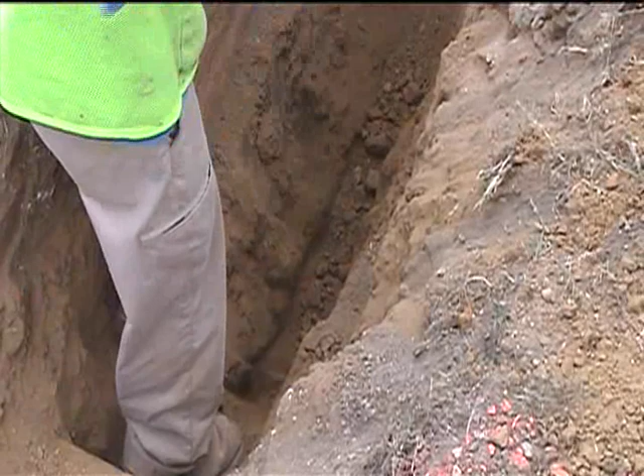Trenches and excavations are common at many construction sites and are considered one of the most dangerous construction operations. Digging a hole in the ground seems simple, but it is estimated that over 100 deaths per year occur due to cave-ins and other excavation hazards. Digging can be a major cause of concern unless you know proper techniques and the OSHA rules for excavation and trenching. Never dig until you know it is safe.

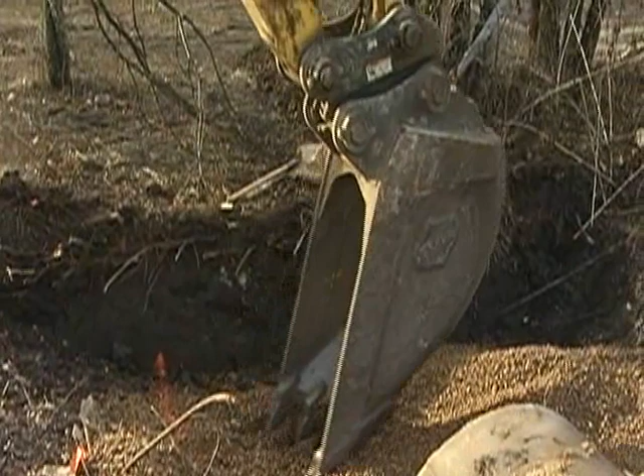This video will discuss the various aspects of excavation and trenching and will cover the following: OSHA requirements, hazards, working safely in and around excavations and trenches, general requirements, mobile equipment, and the competent person.

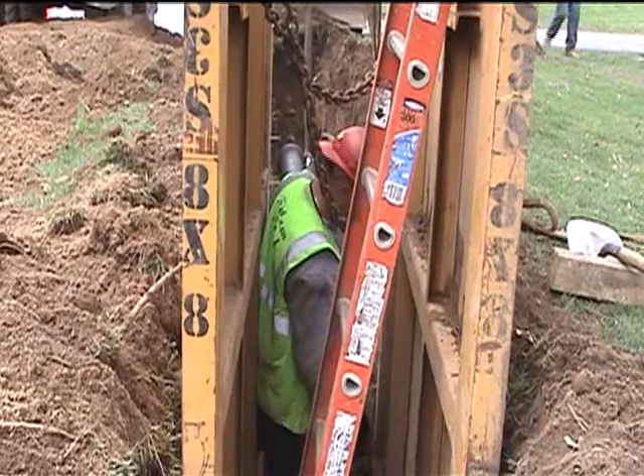OSHA Regulation 1926 Subpart P is the relevant standard for trenching and excavation work. This OSHA regulation applies to all open excavations made in the Earth's surface and requires workers in trenches and excavations be protected from the hazards that can occur in the operation. Prior to any excavation or trench work, the OSHA requirements should be reviewed and followed.

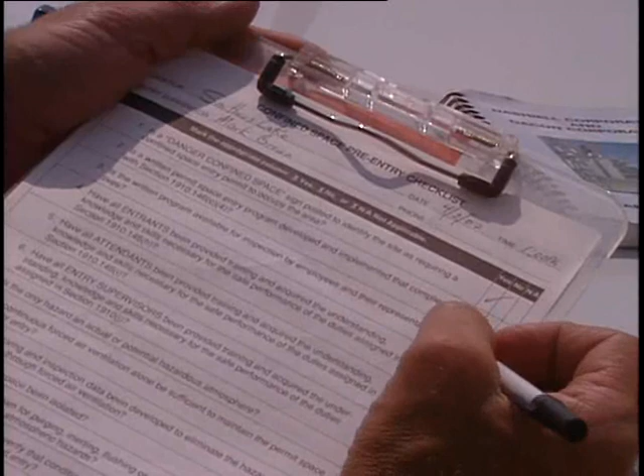Companies are responsible for knowing and following current federal, state, and local laws, implementing an effective health and safety program, and ensuring all affected employees work safe and follow rules and regulations.

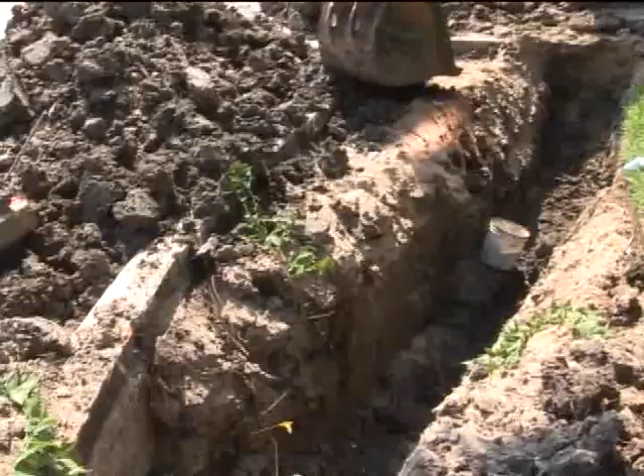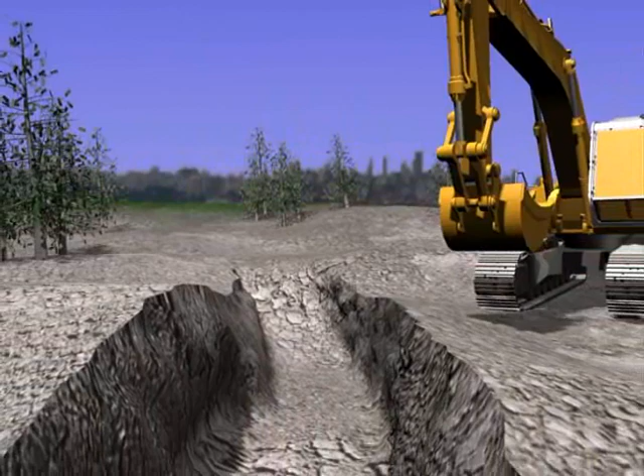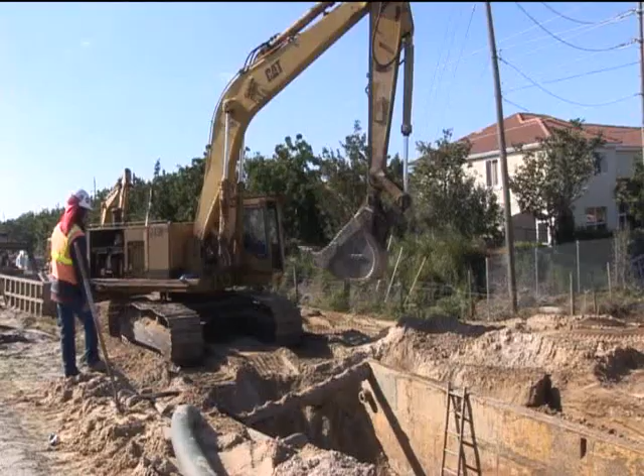By definition, a trench is considered an excavation, but there are differences between the two types of openings. An excavation is any man-made cut, cavity, trench, or depression in an earth surface formed by earth removal. A trench is described as a narrow excavation made below the ground that is deeper than it is wide. Trenches can be up to 15 feet wide.

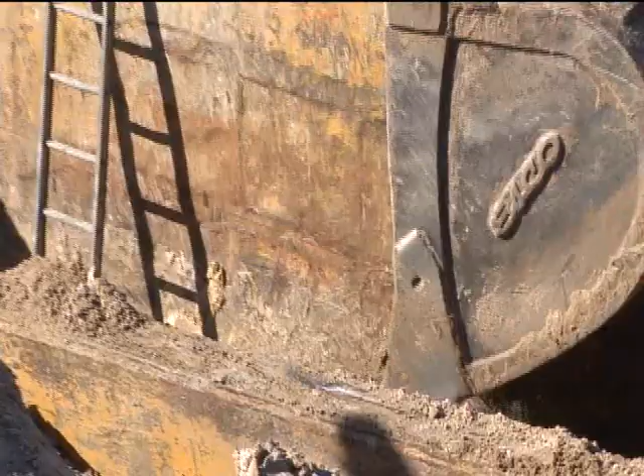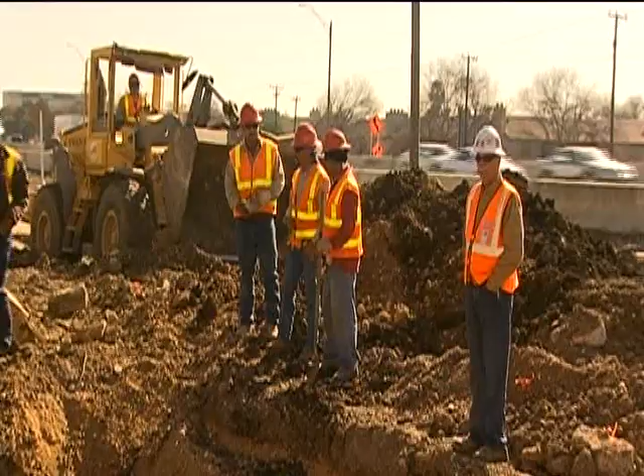The most feared of all the hazards is the possibility of a cave-in. All excavations are hazardous because they are inherently unstable. Workers can be seriously injured or killed if the sides of a trench collapse. Unsafe trenches are the major factor in many trenching hazards. Trenches don't have to be deep for accidents to occur. Serious injuries are also possible in shallow trenches that are less than 5 feet deep.

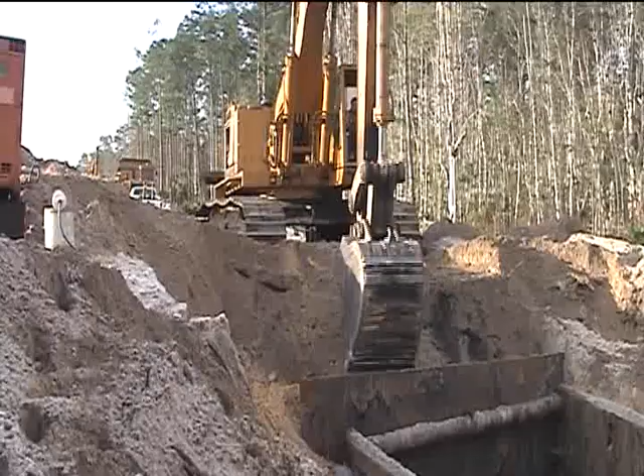A cubic yard of dirt can weigh up to 2,700 pounds and is capable of moving at 25 feet per second. A cave-in makes very little noise and gives very little warning prior to the collapse. Some causes of cave-ins include vibrations from equipment or traffic in the area, weight of equipment near the trench edge, weight of excavated material, referred to as spoil, too close to trench edge, poor soil condition, and rain or water which weakens the trench walls. If more than one condition exists, then the risk of collapse increases.

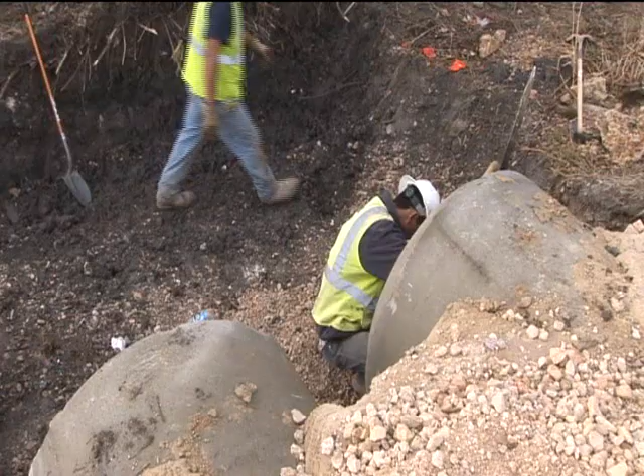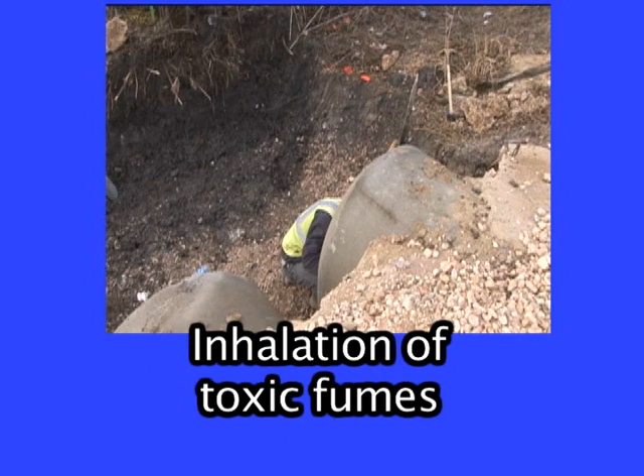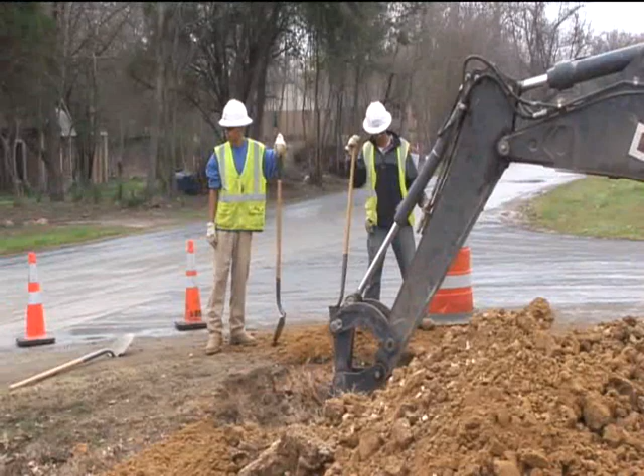Sometimes, excavations are considered to be confined spaces. Asphyxiation due to lack of oxygen in an excavation can occur. Inhalation of toxic fumes released during a dig is also possible. Drowning, electrocution, explosions, and fire are other possible hazards. And finally, when working near the trench, the risk of being hit by a vehicle exists, especially if you are near traffic.

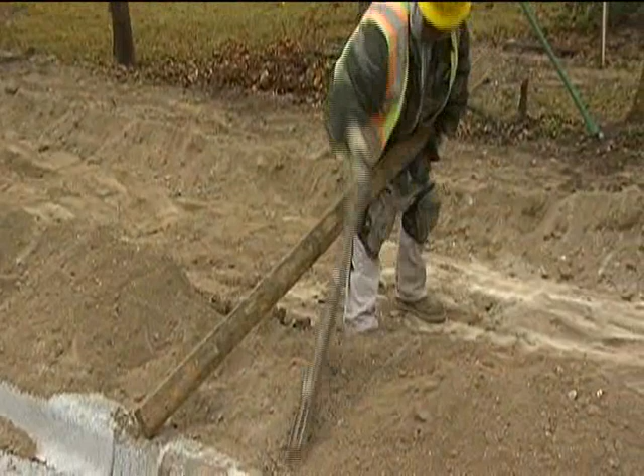Pre-job planning is vital to accident-free trenching. Safety cannot be improvised as work progresses. A key factor to safety includes performing a job site analysis and identifying hazards and possible hazards before work begins. Always take the appropriate measures to eliminate or reduce the risks of hazards. Any employee who is going to work in or near an excavation must be trained.

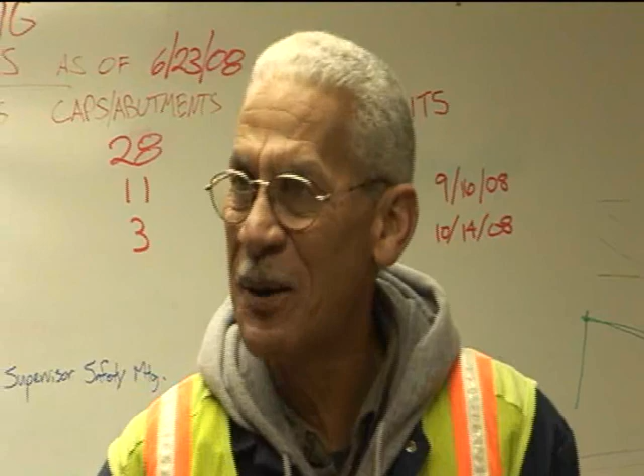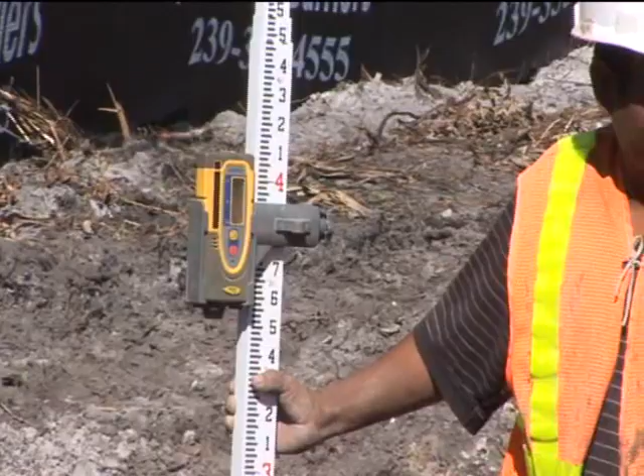A competent person must be on site at all times to oversee every aspect of excavating and trenching. On work sites, this person is generally the supervisor. A competent person is one who has training in soil analysis and in the use of proper protective systems. The competent person is knowledgeable about trenching and excavation standards, must be able to identify hazards and unsafe conditions, and must have the authority to stop work when unsafe conditions exist.

The competent person requires a greater level of training and experience than a normal worker. Any trench or excavation that is 5 feet or more deep requires the use of a protective system.

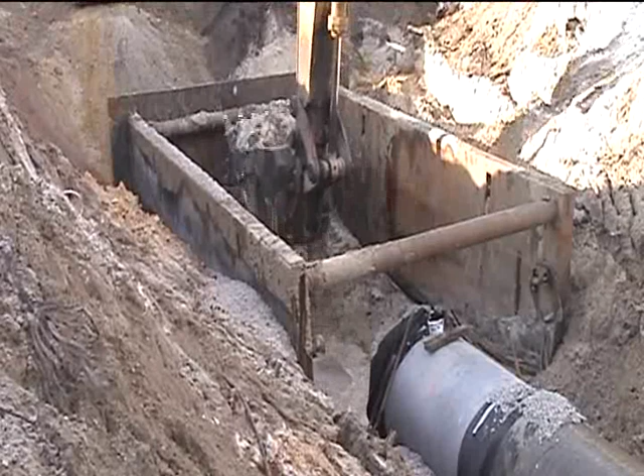Some contractors require the protective system to be in place in all excavations over 4 feet deep. If excavations are made entirely in stable rock or are less than 5 feet deep, and a competent person has determined that there is no potential for a cave-in, a protective system is not needed.

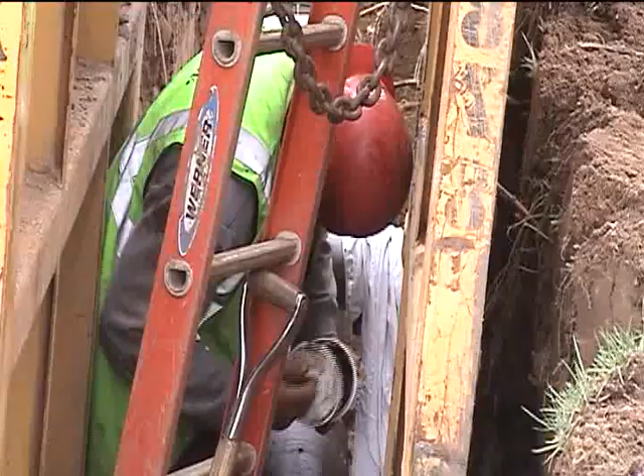Excavations and trenches deeper than 20 feet or below the base or footing of a foundation or wall require a protective system designed by a registered professional engineer. A protective system is a method of protecting workers from collapses of material that can fall or roll into an excavation or trench, or from the collapse of adjacent structures.

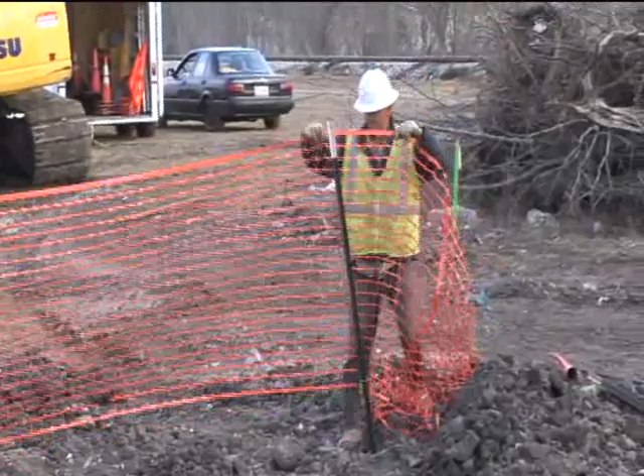Always finish excavation work as quickly as possible. Finally, it is imperative to barricade, protect, or cover an excavation or trench from anyone who may come close when workers are not present.

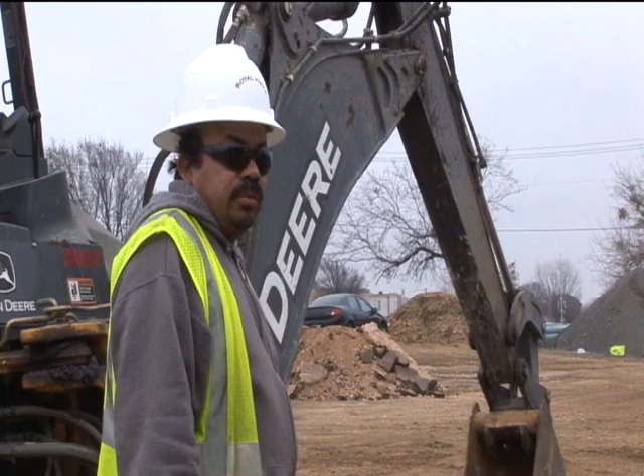Before digging, the competent person must evaluate the soil conditions. There are 4 types of soil classifications: stable rock, which is the most stable; type A, which is considered very good; type B, which is fair; and type C, which is the least stable and is considered very poor.

Soil classification is based on results of at least 1 visual and 1 manual analysis by the competent person. In a visual test, the entire excavation site is observed, including the soil adjacent to the site and the soil being excavated. The evaluator also checks for any signs of vibration. It is common for the competent person to walk the entire site at least twice and observe the areas that will be excavated.

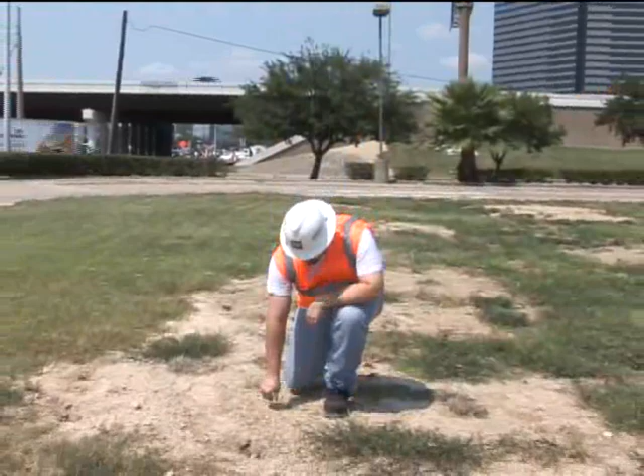A manual analysis consists of physically testing the soil and looking at different consistencies and attributes of the soil. Common tests are a thumb penetration test, which involves pressing the thumb firmly into the soil. The thumb penetration test is the least accurate testing method. A dry strength test, which involves crumbling a sample of soil in your hand.

A plasticity or wet thread test is when one attempts to mold a moist sample of soil into a thin thread approximately 1/8 of an inch in diameter by 2 inches in length. And finally, one can use a pocket penetrometer or hand-operated shear vane to determine the unconfined compressive strength of soils.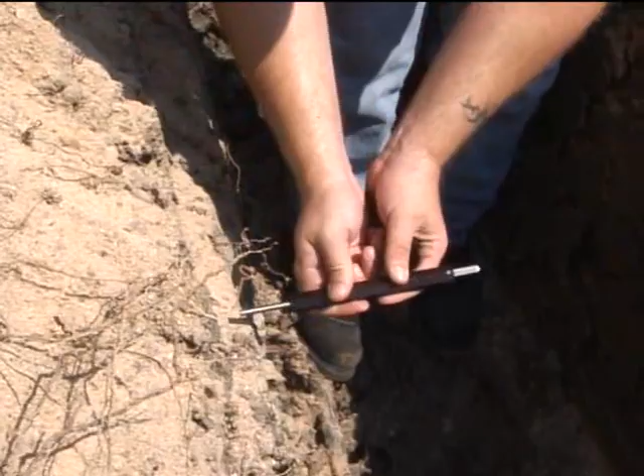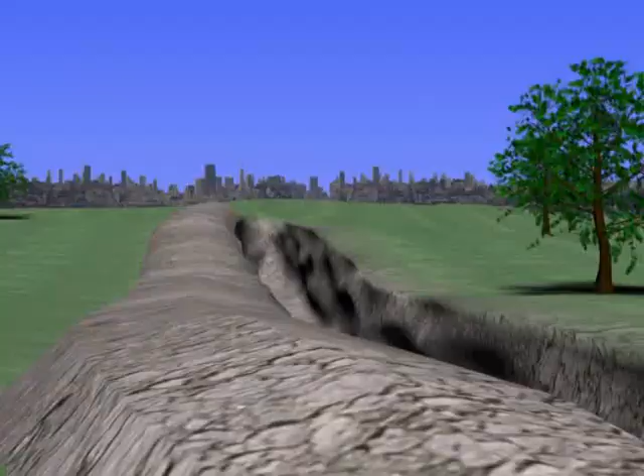Select and construct the appropriate protective systems in accordance with OSHA standards. The system used is based on soil classification. Protective systems include sloping, benching, and support systems including shoring and shielding. Sloping an excavation is when sides of an excavation are inclined away from the excavation so as to prevent cave-ins. The soil condition and the angle of repose determines the degree of slope required.

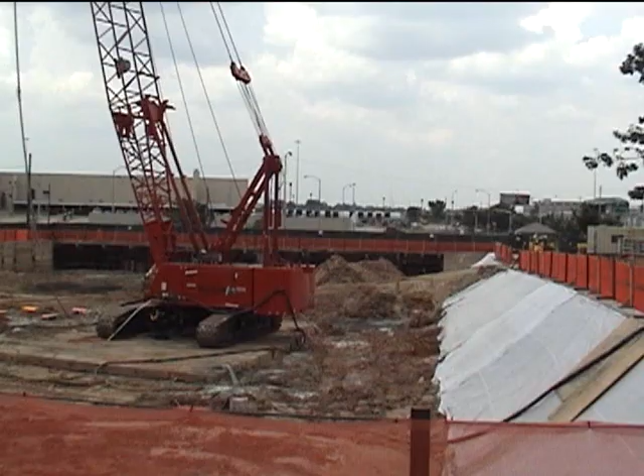Benching is a means of excavating the sides of an excavation to form one or a series of horizontal levels or steps, usually with vertical or near vertical surfaces between levels. If soil conditions warrant and the trench is more than 5 feet deep, a support system structure of underpinning, bracing, or shoring, which provides support to an adjacent structure, underground installation, or the sides of an excavation must be used.

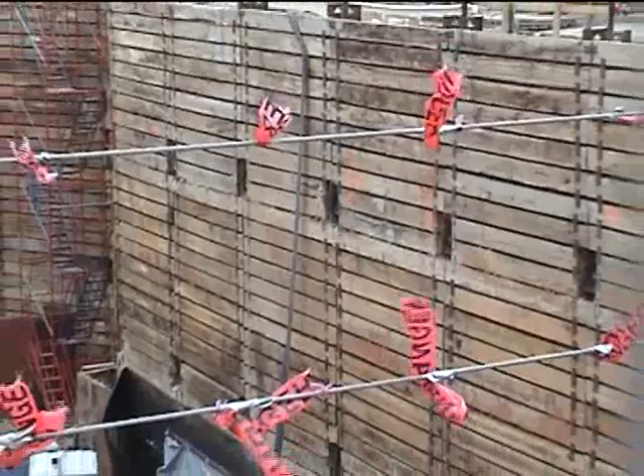2 types of support systems are commonly used. Shoring, which is the process of placing metal or wood panels inside a trench, against the soil walls, and securing them in place with bars and vices. Proper shoring prevents cave-ins. The second system is the use of shields. The shield system is a structure that is able to withstand the forces imposed on it by a cave-in. Shields used in trenches are usually referred to as trench boxes or trench shields.

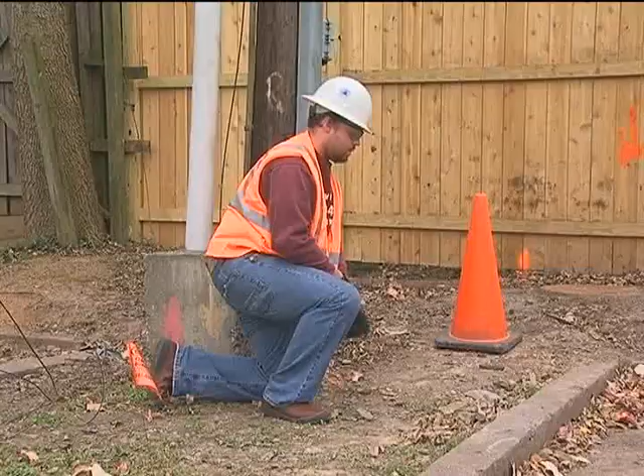Prior to digging, it is imperative that all underground utilities, such as gas, electric, phone, cable, water lines, etc., are located and marked. By calling the nationwide one-call number 811, various utility companies will send out representatives to locate the various utilities lines.

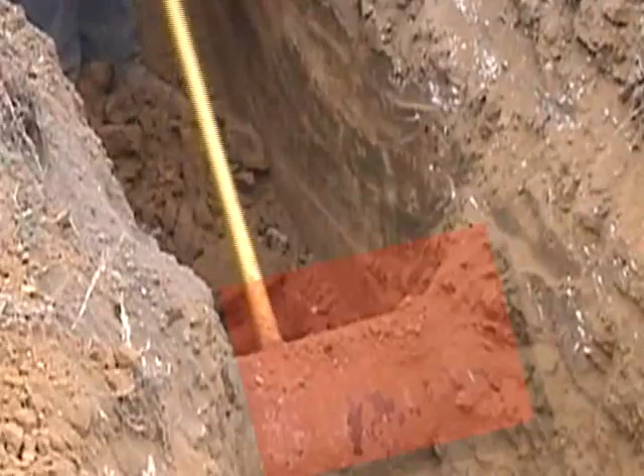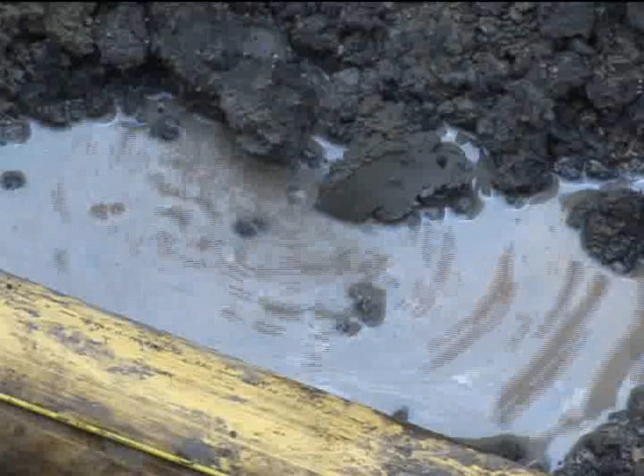While the excavation is open, any underground utility lines must be protected, supported, or removed as necessary. All necessary precautions must be taken to prevent damaging underground utilities. If an underground utility is damaged, notify the utility operator immediately.

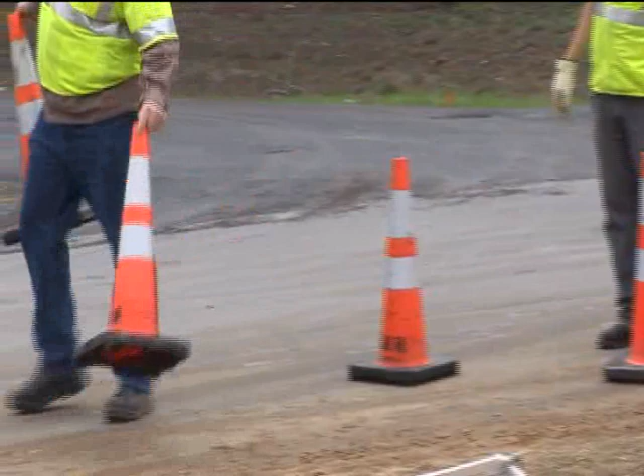If the damage results in the release of hazardous gases or liquids, both the utility operator and appropriate emergency response officials should be notified immediately. Call 911 if appropriate. Before starting to dig, plan and implement traffic control as necessary to protect workers and the excavation.

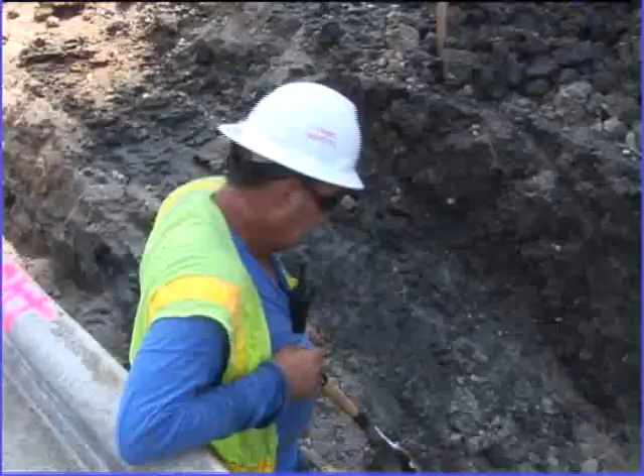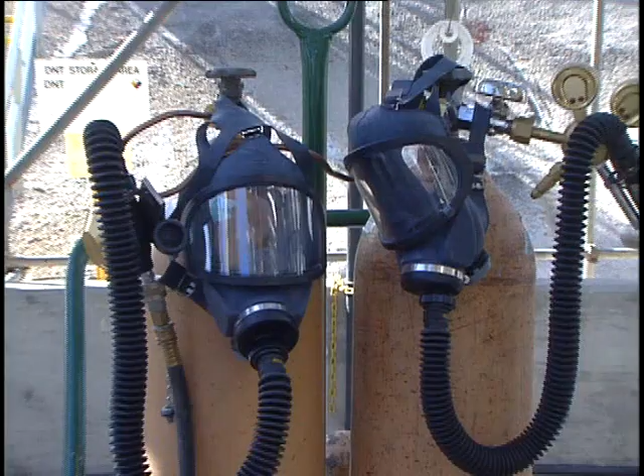Although it is not common, the exposure to harmful contaminants can cause problems for workers inside and around trenches. Workers must be protected from exposure to harmful levels of atmospheric contaminants, oxygen deficiency, hazardous fumes, and toxic gases. Ensure adequate ventilation in the trench or use proper respiratory protection if needed. Always have on hand emergency rescue equipment when a hazardous atmosphere exists or can reasonably be expected to exist. This equipment includes breathing apparatus, safety harness and line, or a basket stretcher.

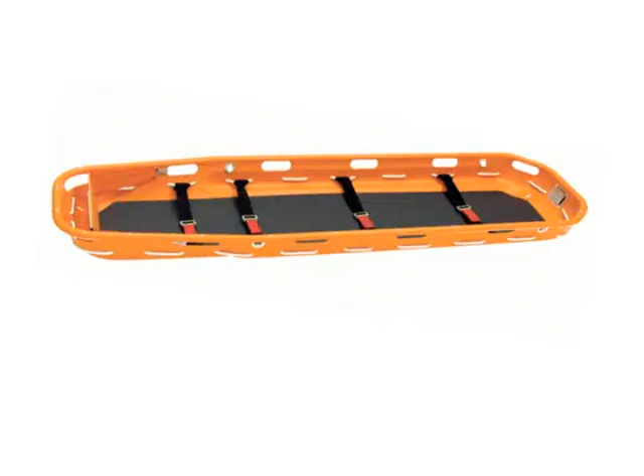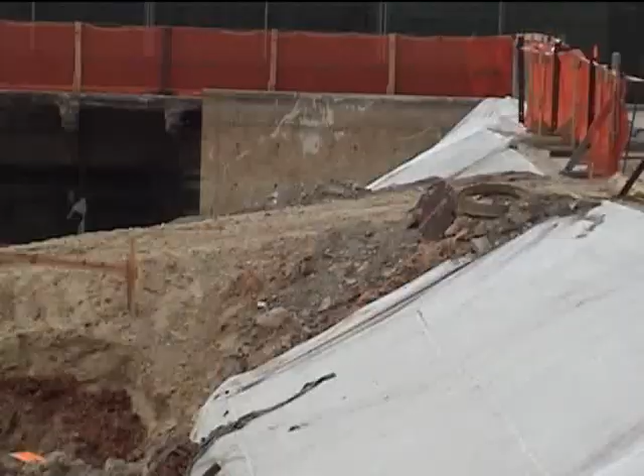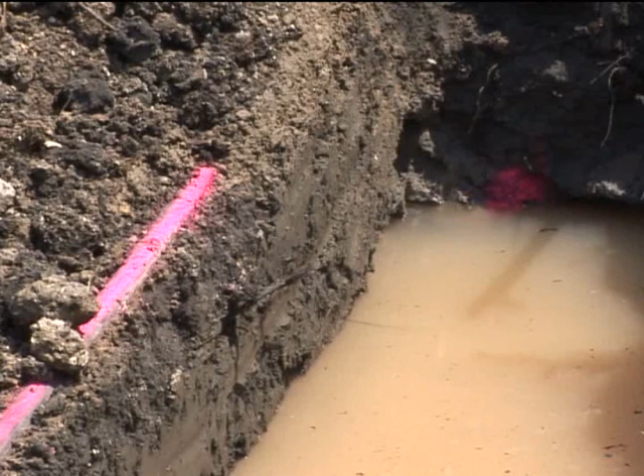Trenches deeper than 4 feet must have a means of entry and exit. This is usually provided for by a ladder. Ladders should extend 3 feet above the top of the excavation and be located within 25 feet of workers. Structural ramps that are used solely for access or egress from excavations must be designed by a competent person. Use ramps made from the earth as a means of egress only if a worker can walk on them in an upright position. If water accumulation is present or possible, use pumps or drainage system. Never enter a trench that has water accumulated in it.

Daily inspection is required by the competent person. This inspection should occur at the beginning of each shift, following any rainstorm, and after any change of condition that could compromise the trench. For example, the movement of any equipment along the edge of an excavation.

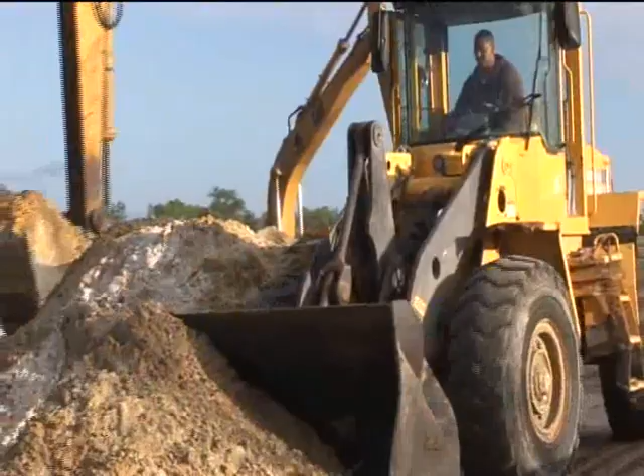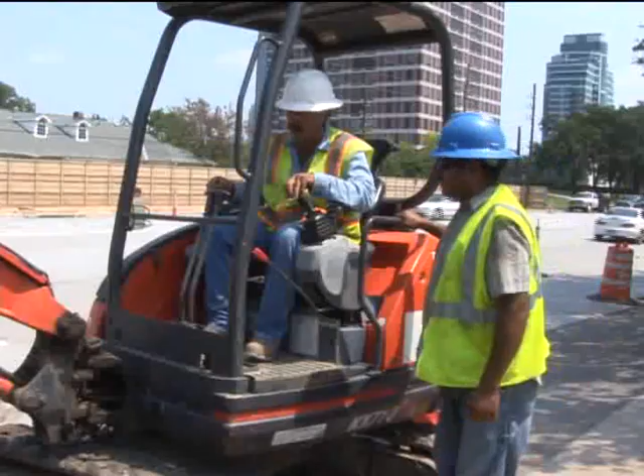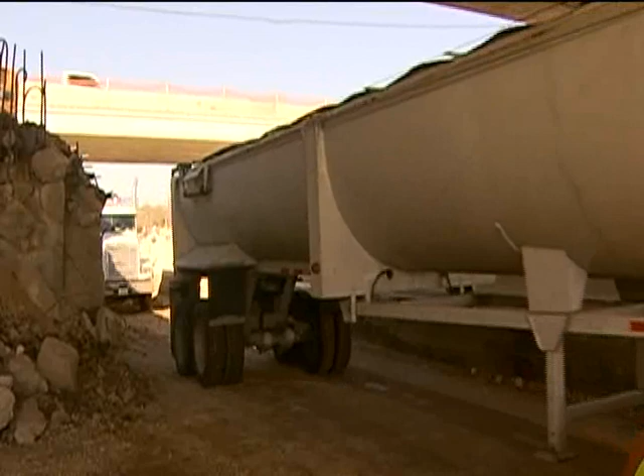Place spoil from the trench far enough away as not to cause a hazard. The weight of the spoil has been known to cause cave-ins. A competent person should direct the spoil's placement. The placement should be at least 2 feet away from the trench. If the worksite does not permit a 2-foot setback, then the spoils should temporarily be removed from the area. Use a retaining device, such as a trench box, which extends above the top of the trench, to prevent spoils and equipment from falling back into the trench.

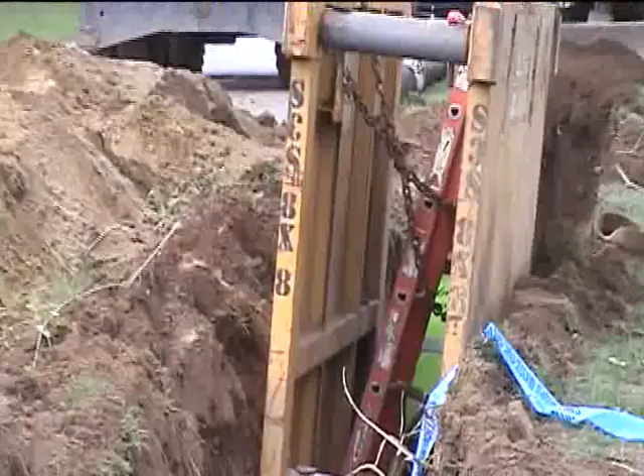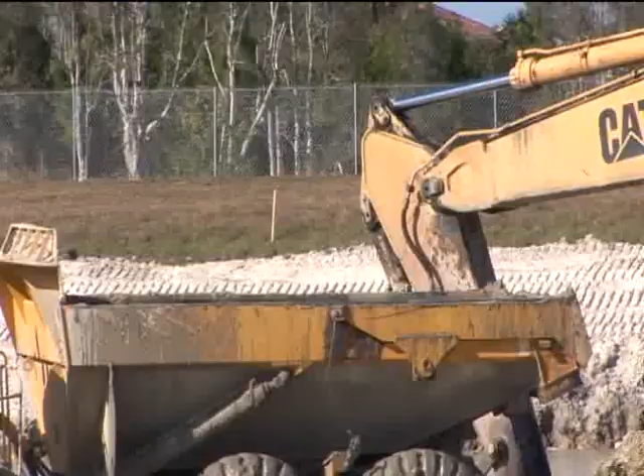Falling loads can also be a hazard for workers. Workers should never work or stand under loads that are being handled by lifting or digging equipment. Workers must stand away from a vehicle being loaded to avoid being struck by falling materials or spillage. All workers on an excavation site must wear hard hats. Safety glasses and steel-toed work shoes are also recommended.

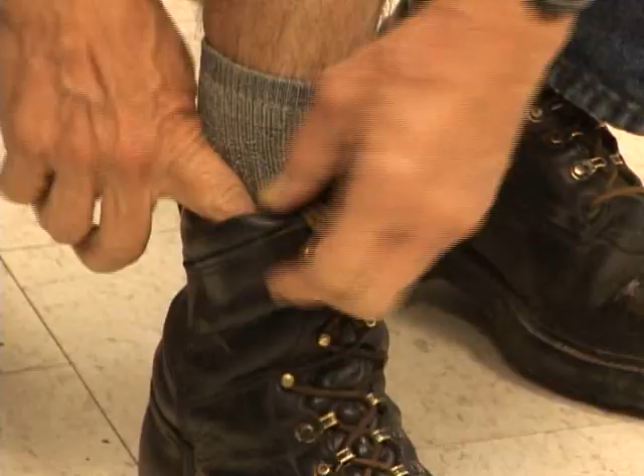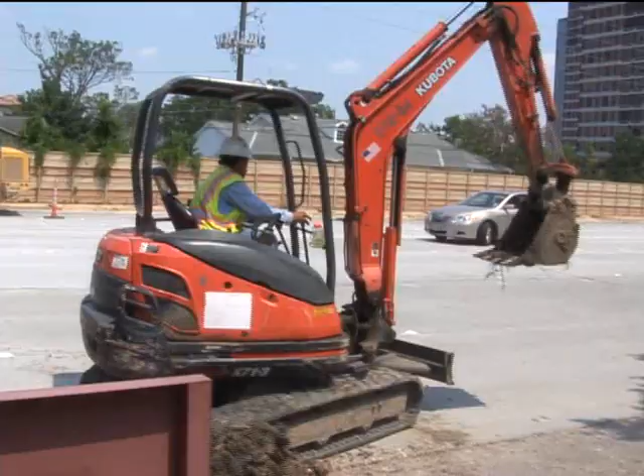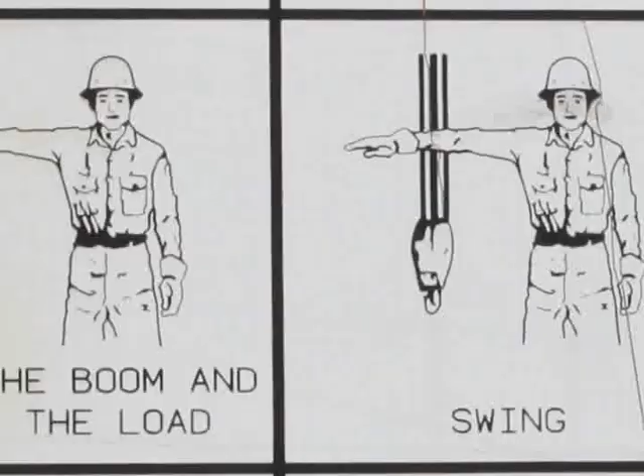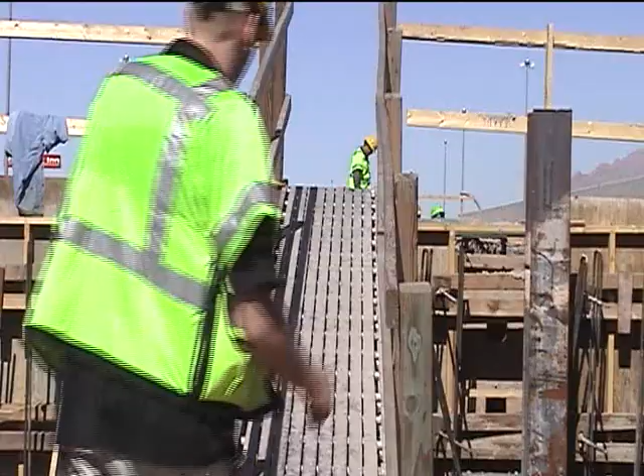While loading with equipment such as backhoes or dump trucks, an operator may remain in the cab as long as the equipment is properly equipped with a cab shield or adequate canopy. Mobile equipment should have a warning device, such as a backup alarm. Steps should also be taken to protect equipment from falling into excavations by installing barricades and using stop logs. The use of hand or mechanical signals only works when everyone on the site is familiar with the signals and knows what they mean. Crossing a trench on its surface should be discouraged. If trenches must be crossed, appropriate walkways or bridges with guardrails must be provided.

In the event of an accident, follow all safety procedures. Alert the competent person, appropriate emergency response personnel, necessary utility companies, and others according to your company policy. Never attempt to rescue a fellow worker during a cave-in. A second cave-in is very likely. Leave all rescues to trained rescue personnel.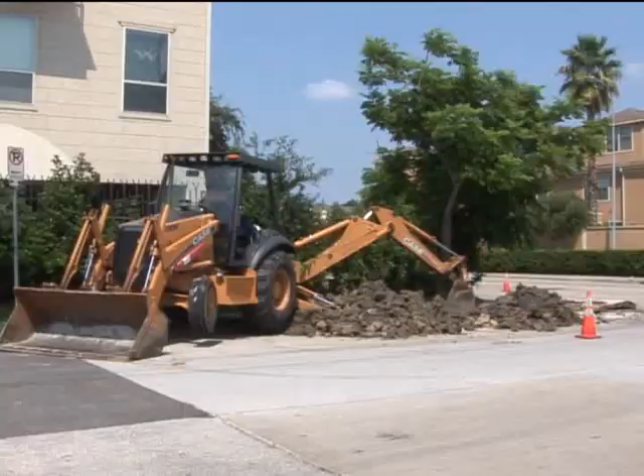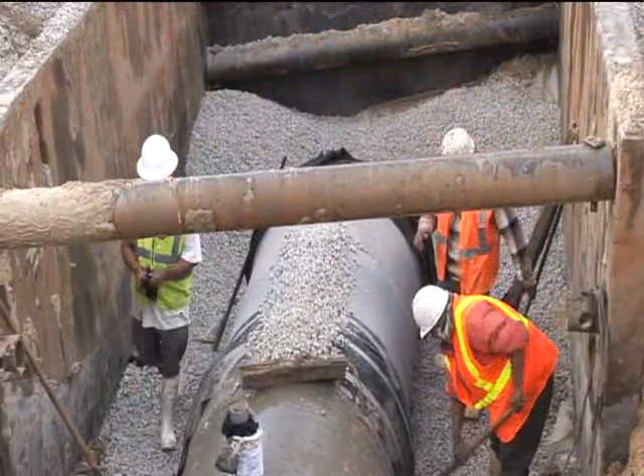This video has discussed many aspects of trenching and excavating. Remember to follow all safety rules. If a situation seems unsafe, alert the competent person and stop work until it is safe to continue. Never take shortcuts or try to skip necessary safety procedures. Finish excavation work as quickly as possible in a safe manner. Remember, you are the one working in the trench or excavation. It is your life that may be at risk.